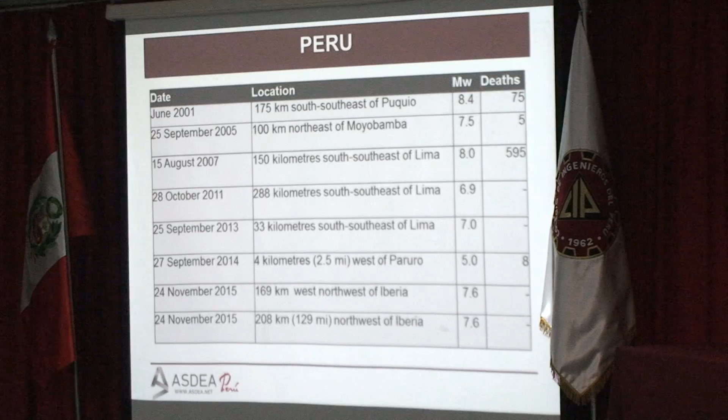I'm going to go really quickly about how you have to approach the idea of how to strengthen a building when you want to retrofit for seismic purposes. So this is a list of things that we have to follow.

¿Cómo comenzamos a pensar cuando vamos a evaluar y a reforzar una estructura, cualquier estructura? Él está mostrando allí una lista, un checklist, paso a paso, qué es lo que deberíamos hacer.

So the first thing is a structural survey. You need to investigate how the building is made, and you have also to develop an experimental campaign. Then you have to evaluate the loads, including obviously the seismic loads, and what is the hazard that you have to face and is function of the site. You have to derive numerical models, so you have to develop the calculations, and the more advanced are the calculations, obviously better is the prediction of the response of the structure.

Then, based on the model, so based on the results of the vulnerability, you have to design the intervention. And you have different options. We are going to talk about the option after. And at the end, when you design the intervention, you need to evaluate also the capacity of the building after the strengthening.

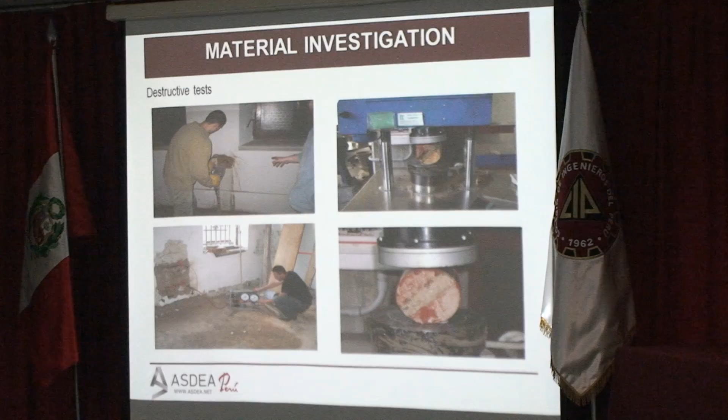And there are also non-destructive tests, including the pacometer to evaluate the details of the rebars, or also bore drilling. We insert inside the masonry a boroscope to evaluate what there is inside the masonry.

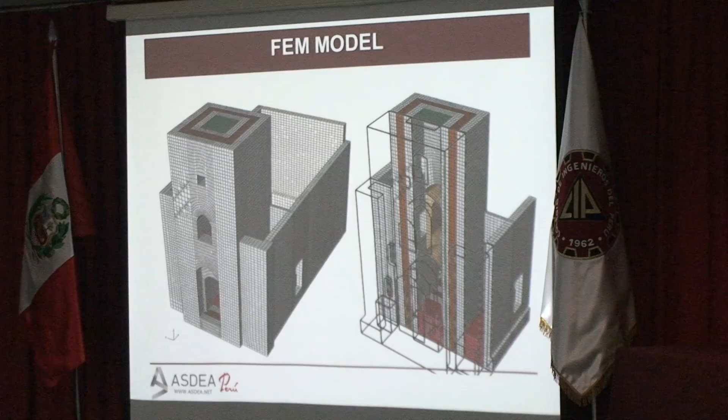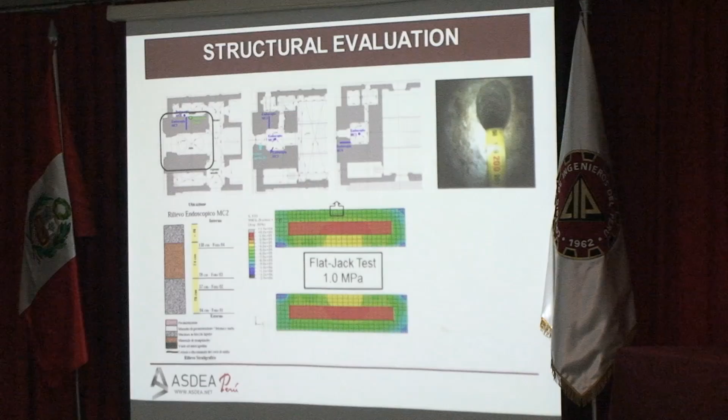We performed all the tests, the experimental campaign to evaluate the masonry properties, and we developed sophisticated nonlinear models to consider the compressive and tensile behavior of the masonry. Se desarrollaron todos los ensayos, destructivos y algunos no destructivos, para poder evaluar las propiedades mecánicas del material, y se hicieron algunas leyes constitutivas para darle las características propias del material: piedra, albañilería, etc.

And we also evaluated the mode frequencies, the natural frequency of the cathedral, using ambient vibration. También se evaluó los modos de vibración a través de vibraciones ambientales, y se compararon con los resultados numéricos en términos de vibración. This is a perfect way to calibrate the numerical model, because we are sure that the frequencies we are considering are the natural frequency of the building. Es una muy buena forma de calibrar nuestros modelos numéricos. Nosotros dibujamos en la computadora, pero de ahí no sabemos si están bien o no. Una forma de calibrarlos es tratar de igualar el modo, la frecuencia de vibración numérica con la frecuencia de vibración de los ensayos vibracionales en campo.

So, as you can see, the model can give all the damage evolution of the building under seismic excitation. This is real — there is an accelerogram you will see after, at the base of the soil, and this is the response of the structure. So as you can see, you can decide exactly where to intervene to improve the capacity of the building. With the linear analysis, you are not able to see this evolution.

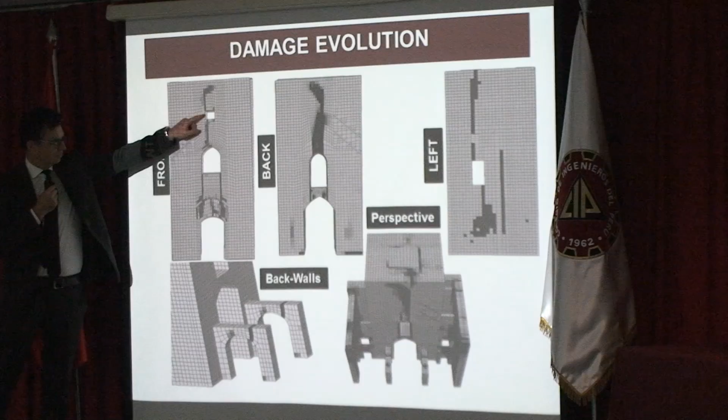Este modelo numérico tiene material no lineal, no hay nada que sea lineal. Aquí se ha aplicado un movimiento sísmico a la base, y ustedes van viendo en el video, en las partes oscuras, cómo se van abriendo las fisuras en esa estructura. Entonces, con estos modelos ya calibrados, uno puede decidir dónde intervenir, qué tipo de refuerzo colocar, cómo hacerlo, etc. Pero lo importante es que a través de un análisis sofisticado no lineal se puede verificar verdaderamente por dónde se producen las fisuras.

Aquí el análisis lineal, como ustedes saben, no funcionaría, porque un análisis lineal asume que el material nunca se rompe. Entonces tenemos que hacer esos tipos de modelos.

Y para esto se necesita un poco de experiencia y de investigación. Por eso trabajamos con doctores en ingeniería, magíster, etcétera, para involucrar la parte académica con la parte profesional. Es algo que nos ha dado muy buen resultado. Los jóvenes que trabajan ahí están muy entusiastas y son empeñosos en hacer todos estos modelos.

So I can show you, this is soil, you put the acceleration at the base, so it's an accelerogram, a natural accelerogram. This is the propagation of the seismic wave through the base of the building, and this is the behavior of the building at the top. So if you can see, this is a seismic acceleration, and this is the shaking of the building, considering all the effects.

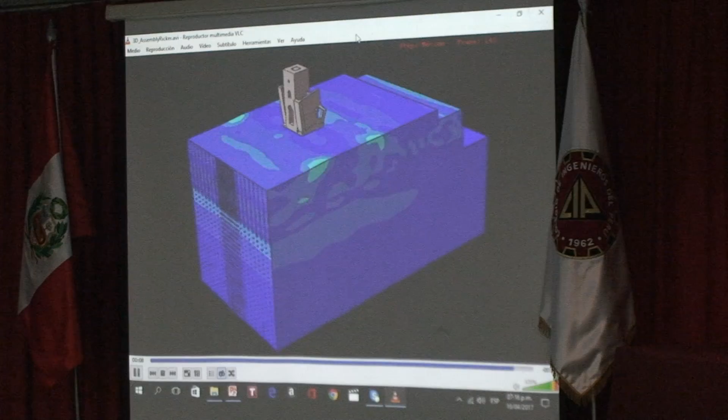Ok, este es el ejemplo del modelo completo. Ven ahí la parte del suelo, que en realidad era una especie de colina, y se investigó también las propiedades del material con diferentes tipos de ensayos geofísicos. Entonces ahí se aplicó un acelerograma natural en la base y ven cómo se van propagando las ondas. Y arriba está la iglesia o cualquier tipo de estructura, donde también se puede ver cómo se propagan las ondas y cómo puede ir colapsando.

Esto es algo muy importante porque a veces cuando uno piensa en estructura histórica, hace maravillas en la parte superior, pero no sabemos nada del suelo. Y también es importante involucrar el estudio del suelo para casos específicos.

This is the most sophisticated analysis that we can perform, but it's very sophisticated, and only few researchers are able to develop such an analysis, so complicated. Something that instead can be used as professional is a pushover analysis. Pushover analysis consists of a nonlinear analysis in which first we load the building vertically with the vertical load, the gravity load, and then we push the building laterally using a force distribution that can represent the seismic excitation.

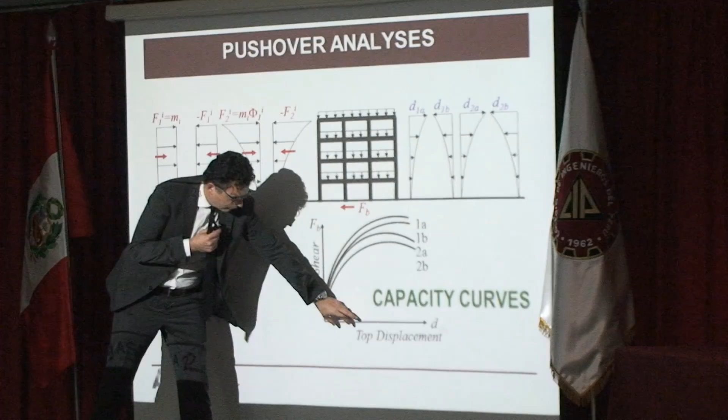The capacity curve depicts the top displacement of the building versus the shear at the base.

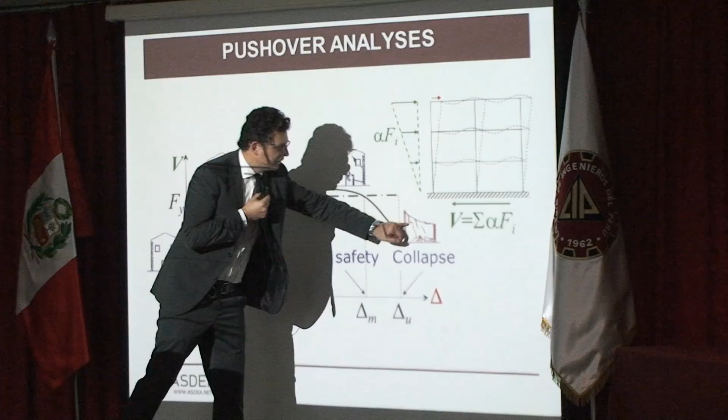the case of concrete. Until life safety, the limit state of life safety, where the building is still safe for a certain lateral load. And this is a collapse limit state in which we are really close to collapse. Like this, basically, with this distribution, we are able to measure the exact performance of the building.

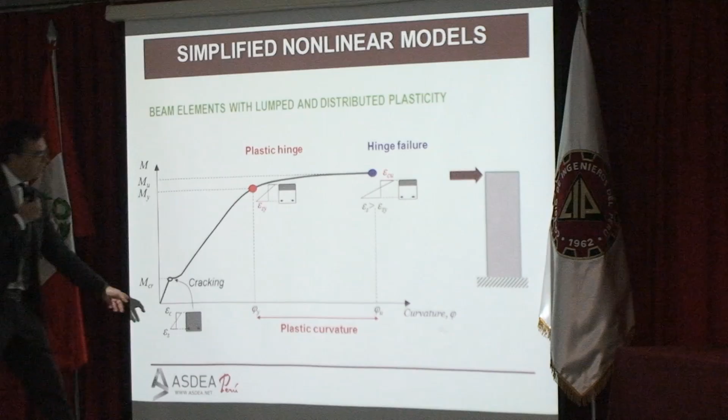Then the concrete cracks, so there is a change in the stiffness up to the yielding of the steel, and then at the end there is a collapse due to compression, failure in compression of the concrete. And this is a behavior that we need to depict when we want to study the nonlinear behavior of the structure.

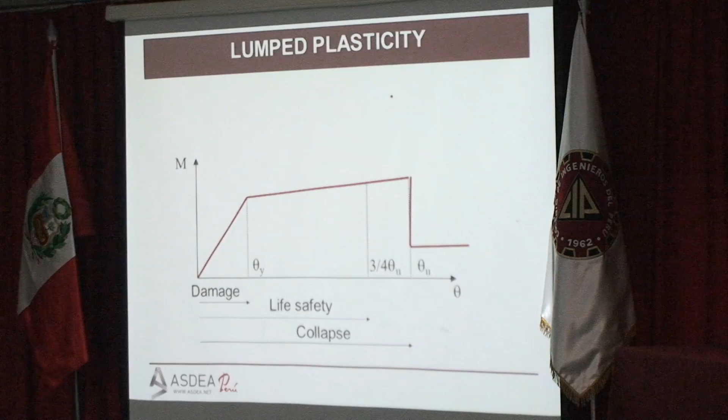So let's make an example so it's much easier, and think of this as a confined masonry building, where we study the behavior of the single panel using a beam element and using lumped plasticity, so the plastic hinge concentrated at the end of the element.

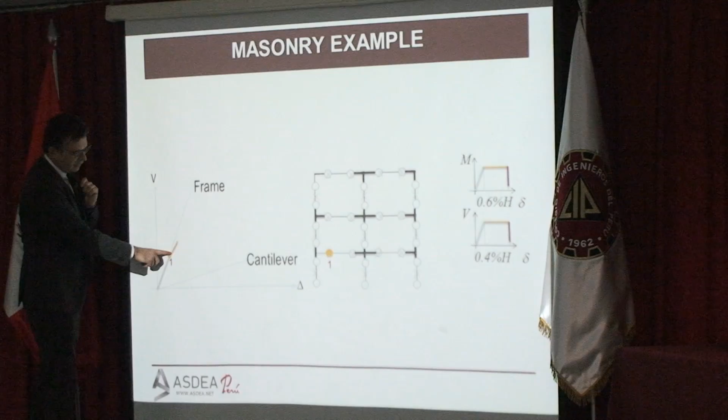And this is the behavior of the building. So we push and we see the behavior. So for example, in this case, there is a hinge, there is a beam that is yielding in tension. So you see from elastic behavior, it changes in plastic. Then we keep on pushing, so there is a failure of the beam.

We keep on pushing, there is another yielding of another hinge. We keep on pushing, the other beams yield, and at the end there is a failure due to the pier failure. And this is a typical behavior that you could observe in a building.

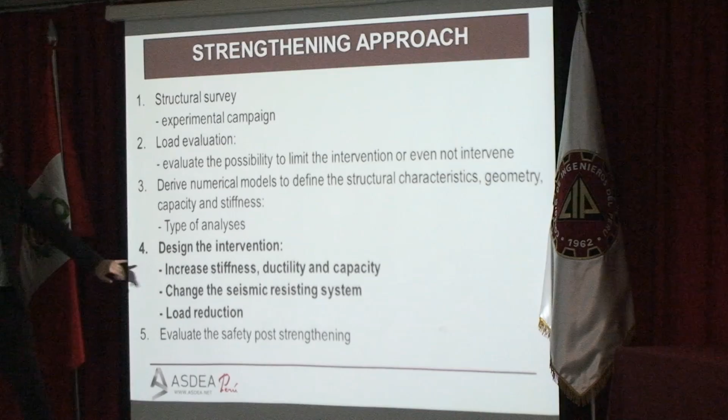So now that we have the vulnerability of the building, since we are able to track exactly how the building is failing, we need to decide how we want to strengthen it. And there are several techniques. We are talking today about innovative techniques, but in particular, I would like to talk about the difference between increasing the stiffness or increasing the ductility or the capacity.

So how you can decide how you want the building to perform. This is the most important part. Or also how you can change the resisting system or reduce the load using seismic isolation.

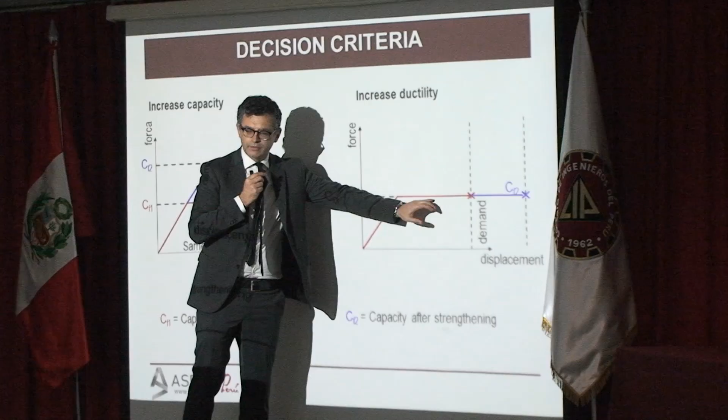Or on the other end, like today we are going to talk about steel reinforced grout or also fiber reinforced polymer. We decide to not increase the strength, but we decide to increase the ductility, so the displacement. So basically we let the building deform more than the existing building.

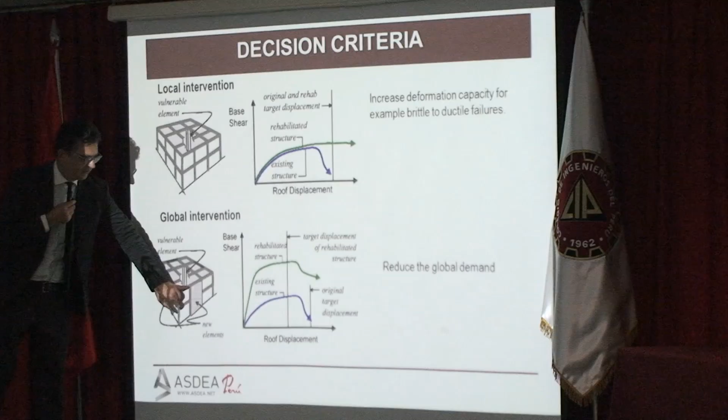Otherwise, I can intervene with a global intervention, so with shear walls, for example, or with an external frame, and in this way, as you can see, I can increase the capacity of the building a lot more than the ductility.

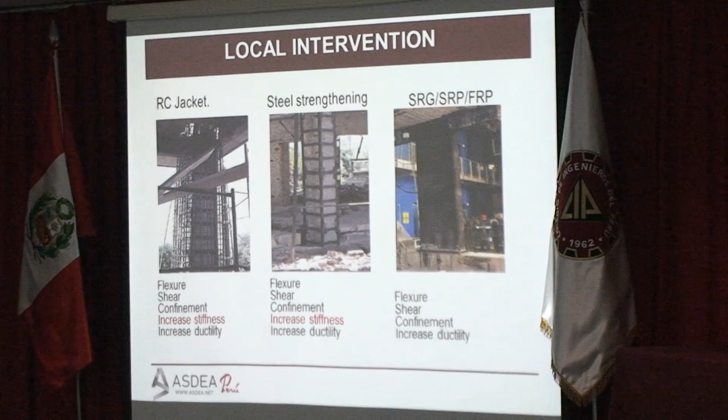Or otherwise, as you can see, we use innovative dissipative braces, or, we are going to talk about this today, seismic protection using seismic isolation.

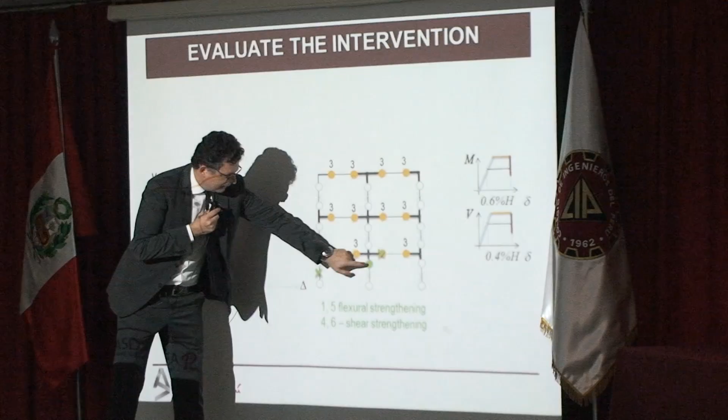This is perfect because I can decide to use a capacity design, so I want the columns stronger than the beams. This way I'm able to achieve a much larger displacement, therefore a much larger ductility, so I can dissipate way more energy. And this is tracked, it's my decision to have this behavior.

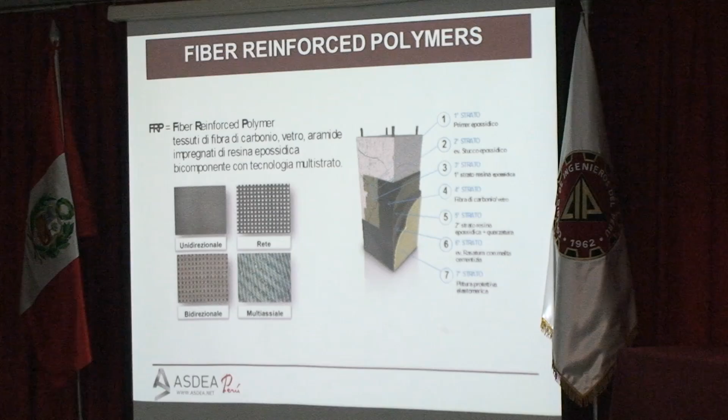So these instead are the new materials that we are studying now, and we are applying in several buildings. We did already. These are carbon fibers. They have high strength, we will see, and they can come in several weights, okay?

And we normally impregnate this with epoxy resin, but lately we are using also grout. So we will see with the grout the efficiency increases because you can use the grout also to repair the columns. So these are the materials, as you can see they are really light, and the thickness is a fraction of a millimeter.

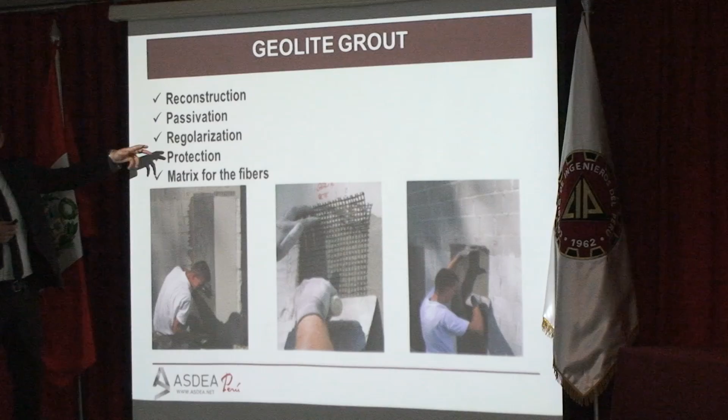So with this innovative grout, we are able to perform this with the company we are working with. It's called Kerakoll. We are going to talk about it. We can perform the reconstruction, the passivation of the steel rebars that are oxidized, regularization of the surface, protection, and also we can impregnate the fibers at the same moment. So basically, we will see the application.

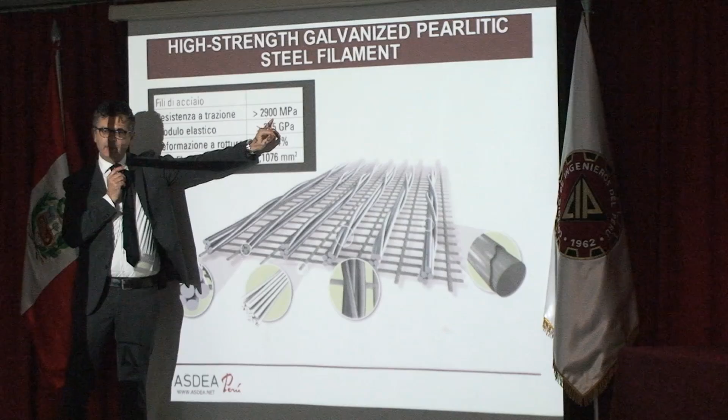So the tensile strength of this material is 2,900 megapascals, so it's roughly 5 times the normal steel.

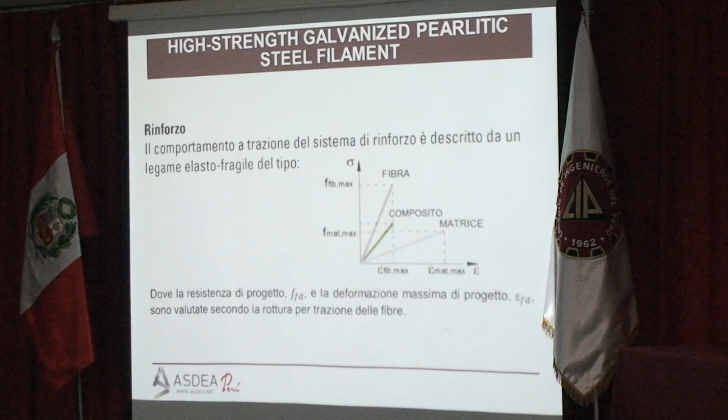So we are performing a lot of tests. The company we are working with here is Kerakoll. These are tests performed by the University of Roma Tre, and this is the strength of the material in tensile test.

These are the applications that we are going to show, okay?

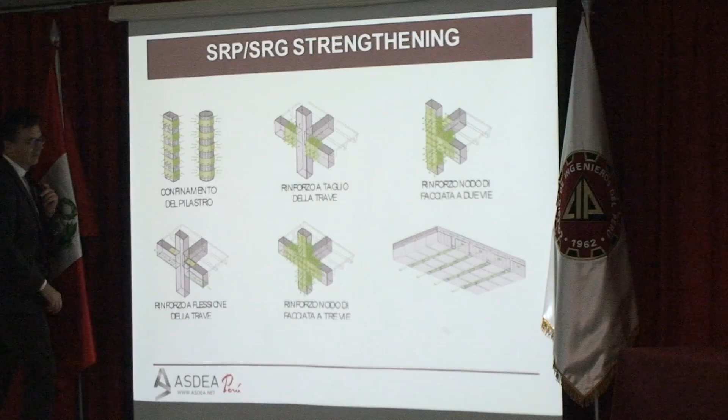So, column confinement to increase the ductility, shear strength of the beam, reinforcing of the joint to increase the shear strength, flexural reinforcement, joint reinforcement, and also slab reinforcement.

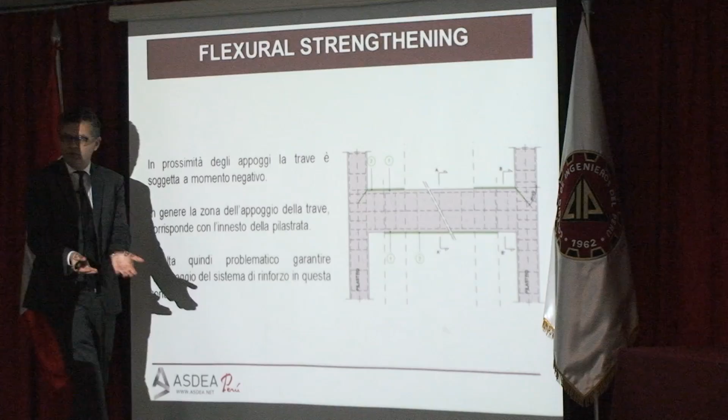So this, to give you an idea, is a flexural strengthening of the beam. You see, the only thing we do, we literally glue the material I showed you with grout or epoxy under or above the beam.

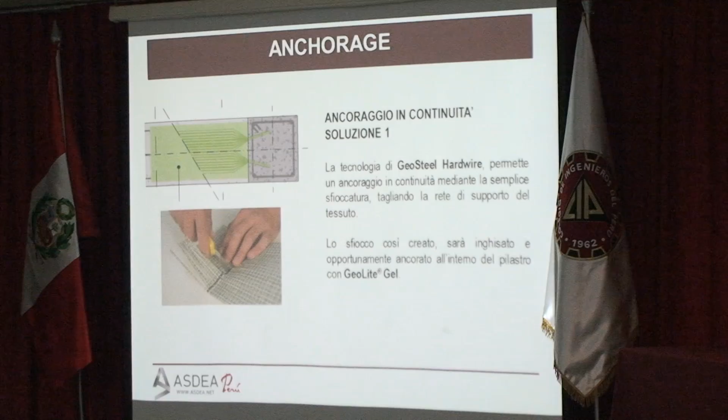So these are some examples of how we guarantee the anchorage, also bending the fiber and then wrapping the column around the fiber. This is a much better detail than carbon fiber, because carbon fibers are very difficult to anchor, to guarantee the anchorage, because they have a very low shear strength.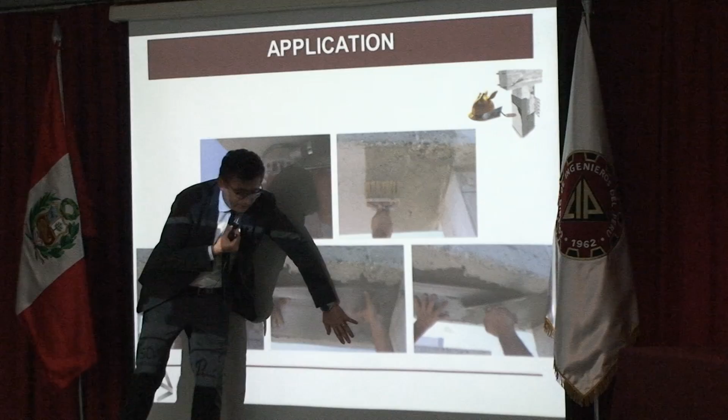Okay. So this is the application of the flexural strengthening. So we clean the surface, we apply, in this case, the epoxy resin, or it could be the same with a layer of grout. We apply the fiber, and then we finish it with the final finish of grout or epoxy resin at the top to impregnate the fiber. And it's very simple.

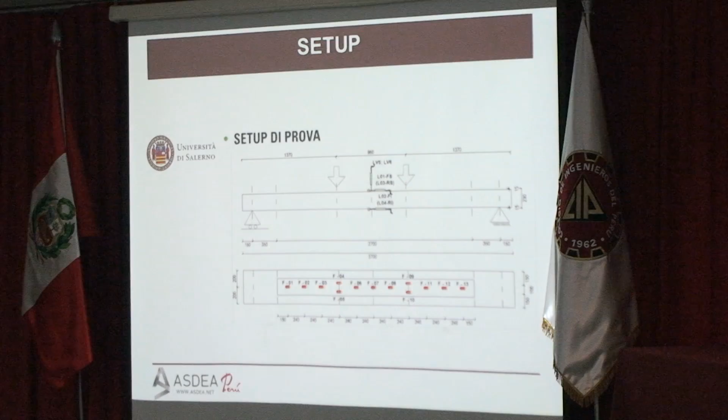Como ustedes ven, se puede hasta duplicar la capacidad solamente con una malla que tiene un espesor de 0.3 milímetros de espesor. El sistema permite, como dice usted, duplicar, o sea que una malla con otra malla. No, aquí estamos solamente... No, it's possible.

Like if you use, for example, the thinner fiber, you can also duplicate or triplicate the amount of fiber. Se puede, digamos, colocar una sobre otra, no hay ningún problema, pero en este caso está variando el espesor. O sea, hay esa malla que está pasando, algunas de repente tienen un espesor de 0,2 milímetros, otras tendrán de 0,4, etc. Pero también se puede colocar una sobre otra.

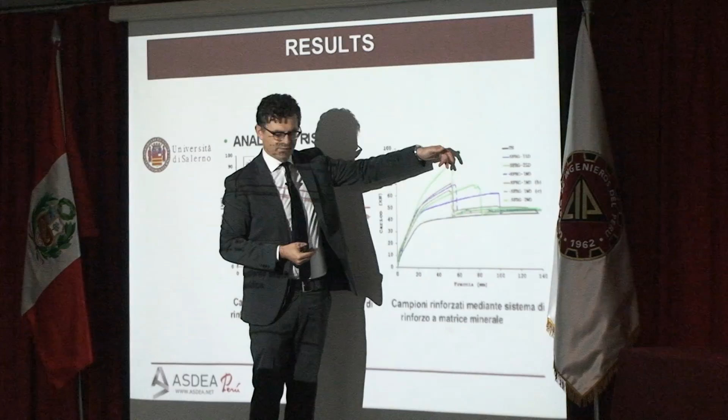Pero questo qua, this one, for example, is 2 layers of medium density. Medium density together, glued together. Ok, esa curva verde, por ejemplo, son 2 mallas colocadas, de otra densidad.

So, I want to show you a design example. Actually, first I want to show you this so you can see. Va a mostrar ahora, por ejemplo, un ejemplo de diseño. Al último vamos a dejar la presentación para que ustedes de repente puedan ir analizando así.

Example in Italy of buildings that need to be strengthened. They are highly degraded. Per studiare il comportamento dei nuovi materiali compositi in fibra di acciaio e matrice minerale per...

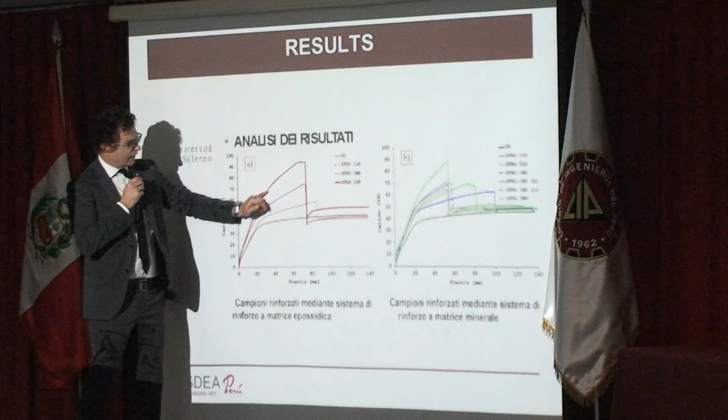So this show that some of the tests that we perform to see how the system is behaving. As you can see, when it reaches a certain point, there is a brittle failure, so there is a decrease in ductility but increasing capacity in the case of the flexural beam.

Son algunos de los ejemplos de los ensayos que se han realizado en colaboración con otras universidades, en el cual también se puede incrementar la capacidad y algunas veces también hasta la ductilidad.

So just a quick example of a building that we strengthened, so you can see how we designed the strengthening of this building. This is a building that was damaged during the earthquake of 2009 in Italy. Es un ejemplo, ahora va a ser un ejemplo de diseño, de cómo reforzar una estructura que fue dañada en un terremoto en el 2009, en la parte central de Italia.

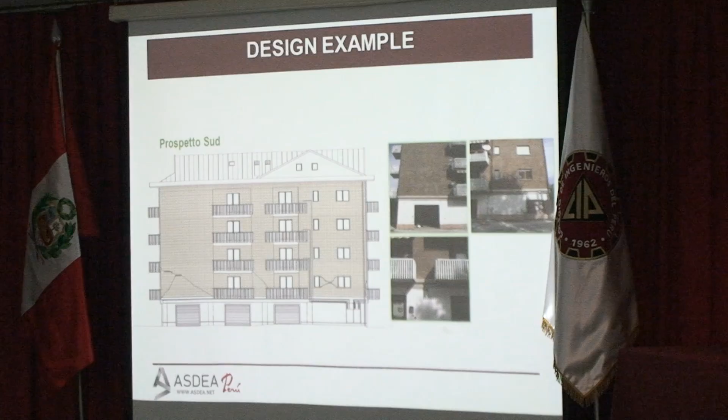So this is damage. As you can see, there are shear cracks in the building, especially at the base of the building. So north, south, east. Sí, ahí como ustedes ven, ahí el patrón de daños en diversos muros y elementos también de concreto armado en el interior.

So as you can see, this is a numerical model. We can't go too much into details. This is a beam that we are strengthening. The beam doesn't have enough capacity, so we decided to strengthen it using the steel epoxy combination.

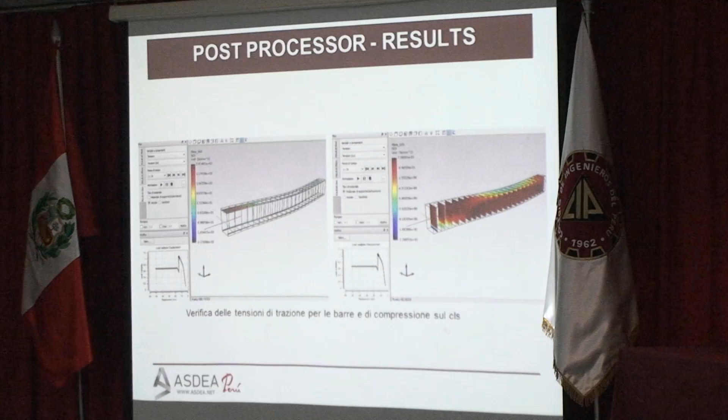Or this, the steel of the rebar. So this is very interesting, the cracking of the concrete.

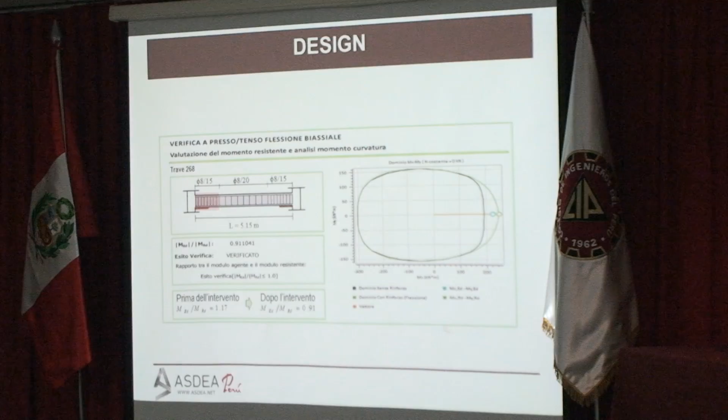And this is the example of what we have to do for the strengthening.

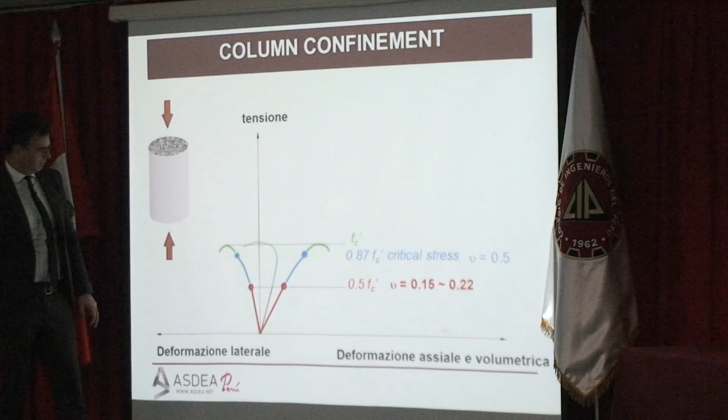At 87%, the concrete starts cracking, and at a certain point, at 100%, you reach the maximum level, and then you have a brittle failure of the sample.

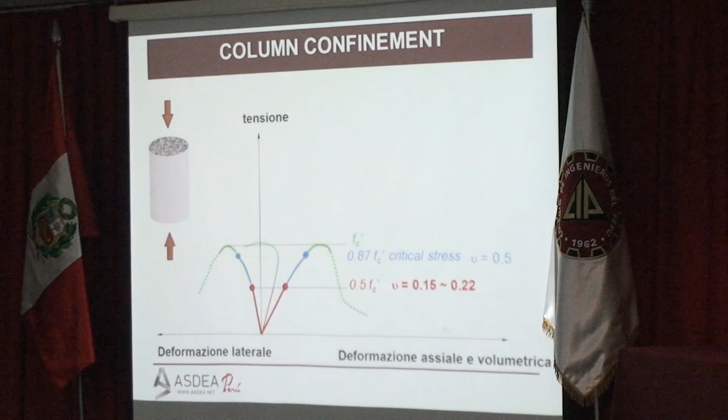If we wrap it with the steel fiber, this is the behavior, the SFRG. So up to roughly 50% of the load, the steel is not playing any role, because the Poisson modulus of the concrete is similar to the Poisson modulus of the steel. Above this, the cracks increase, and you see increased ductility of the system and increased strength of the system, just from wrapping the system.

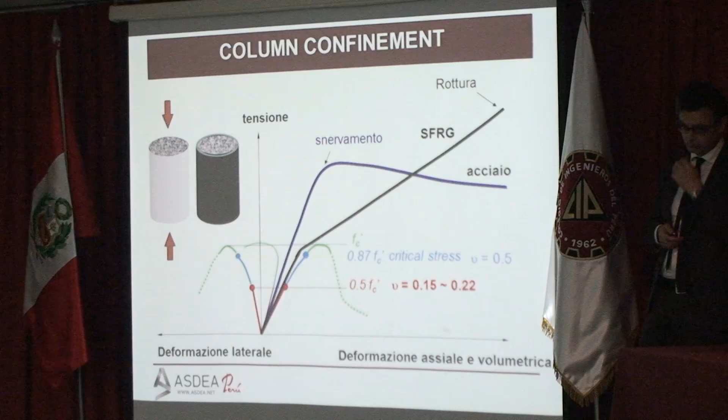For this application, similar to before, there is a cleaning of the surface, preparation of the surface, then there is a first layer of grout, bending of the steel fibers, then there is a steel fiber applied, and then the final finishing with the grout.

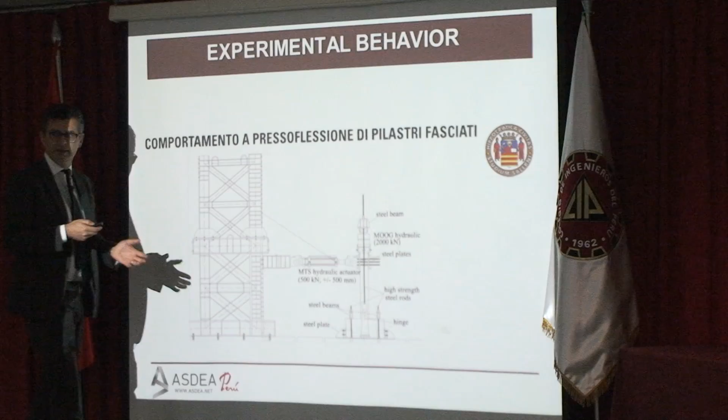And we are going to show you the different behavior with the wrapping and with the existing column.

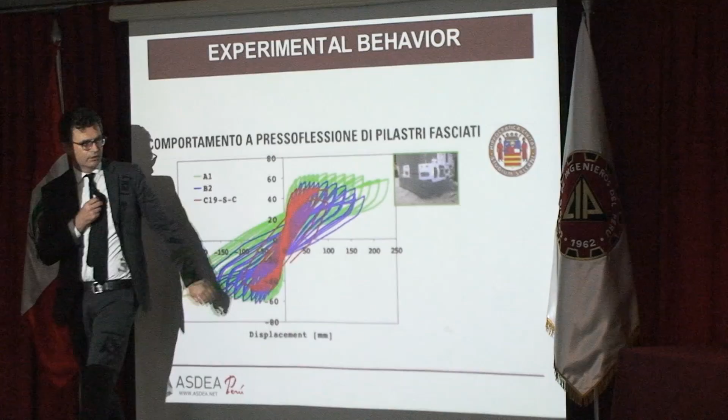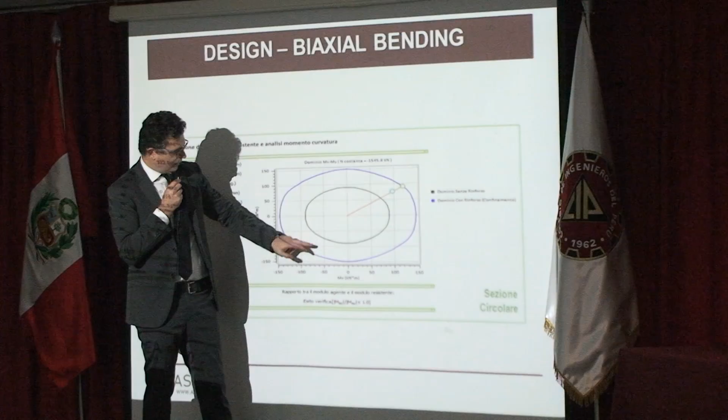And this is the behavior. So this is a biaxial bending strength before the application of the fiber, and this is the capacity after the application of the fiber. Just wrapping basically doubles the capacity of the element.

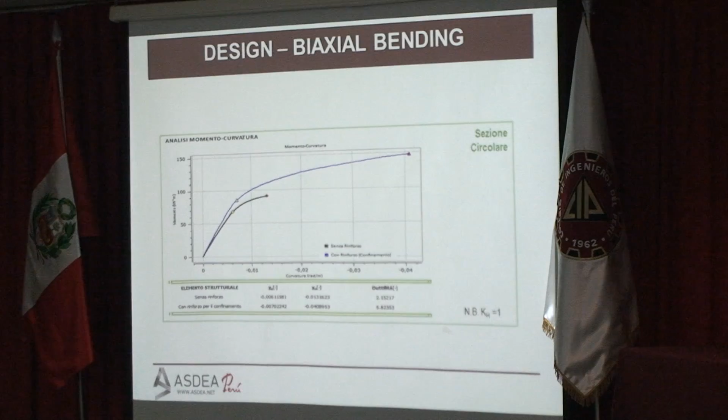So in this application, as you can see, if we only increase the strength due to the confinement, we don't even need to anchor the fibers to the foundations. We want to increase also the flexural strength, so we need to also use vertical fibers.

So it's only important to know that in this way we can increase the ductility and also the strength.

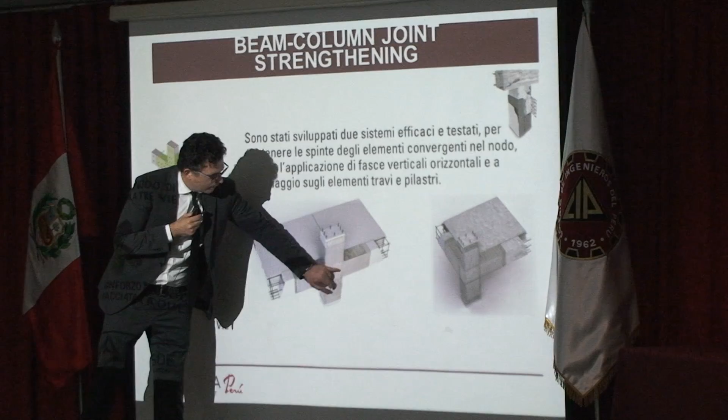So this is a reinforcement of the joints. Most of the time, reinforced concrete buildings have problems because of the joints, column-beam connections.

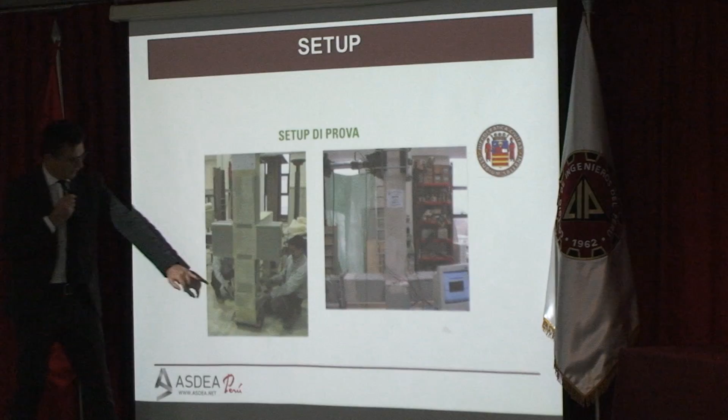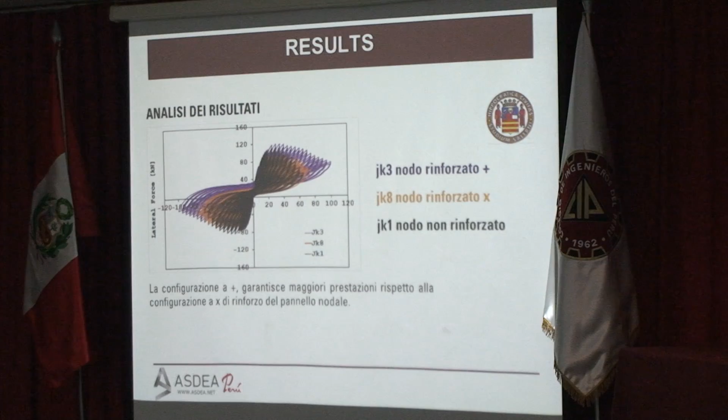So another example of design, we normally strengthen the joints that are external, not the joints that are internal, with basically the intersection of four beams, because they are confined.

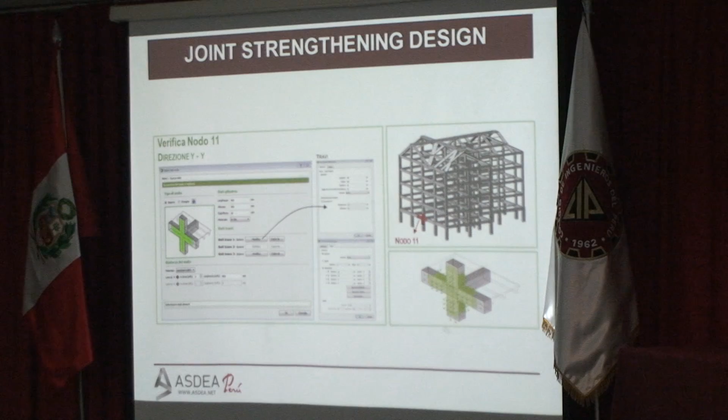The last part is a shear strengthening. We can increase also the shear capacity of the beam, just gluing externally the steel fiber.

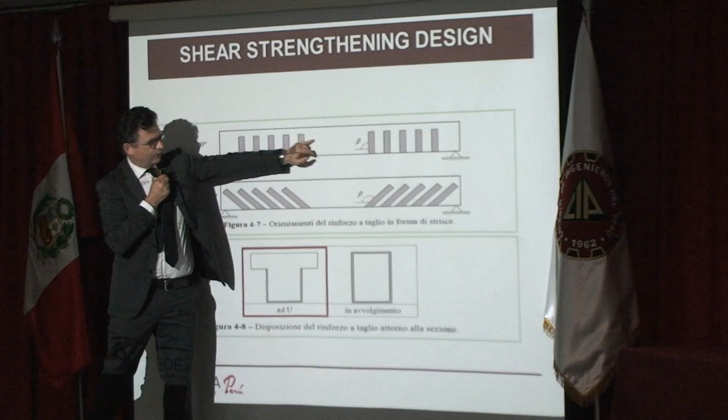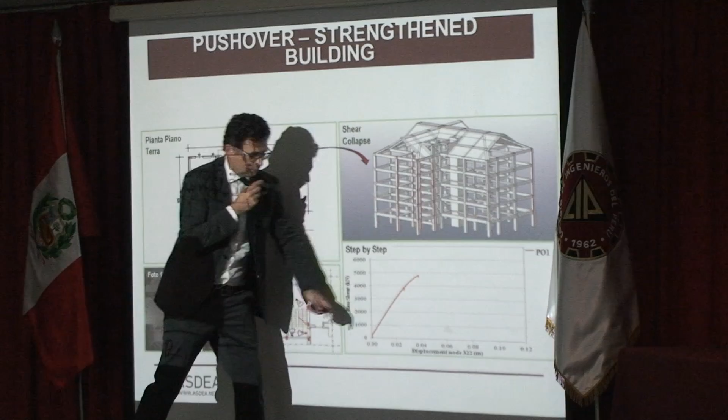Now we strengthen the column in shear, that column in shear.

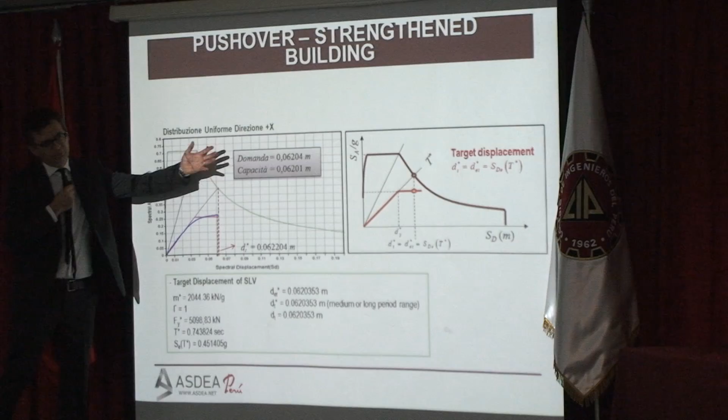This is just an example of the capacity that we reach, but we don't go into details because it's late. I want to show you the next part.

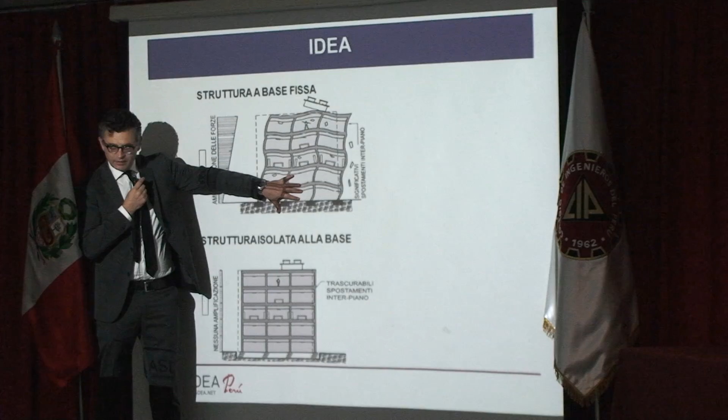So what is the effect of the isolation? You probably know this seismic excitation. If the building is fixed at the base, it is shaking in this direction with a very high acceleration. If we are able to put the isolation at the base, the building is moving rigidly and the acceleration is decreased, as we'll see, decreased a lot.

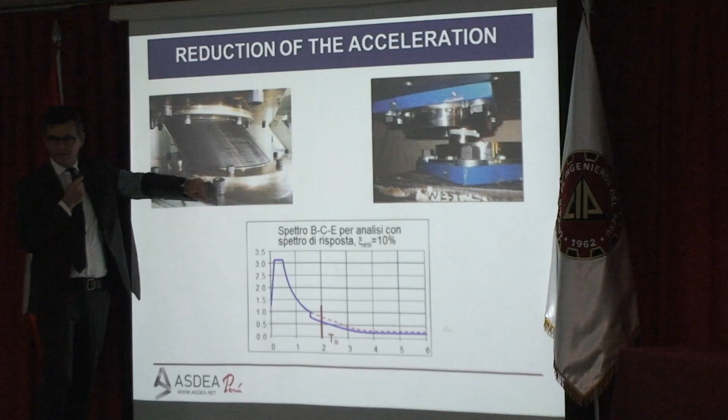Okay, this is the effect. So these are the isolators. These are lead rubber bearing isolators, made of rubber and lead. And these instead are friction pendulum. So this is a response spectrum of the site. When the building is not isolated, typically we are at the plateau or just after the plateau, so you have an acceleration at this level. If we isolate the building, so we increase the period of the structure, we can reduce the acceleration even 10 times.

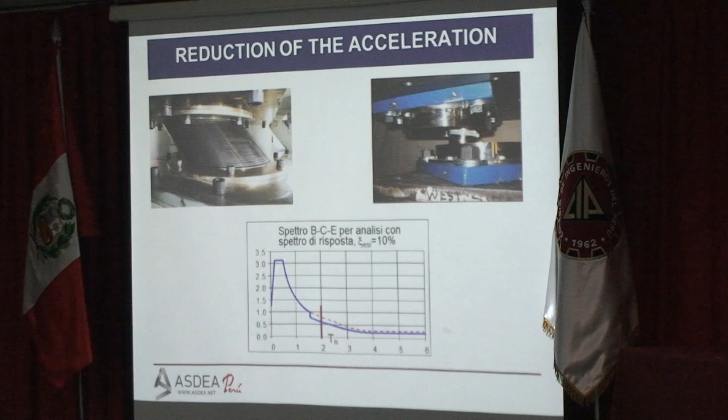So I want to show first a video so everything is easier.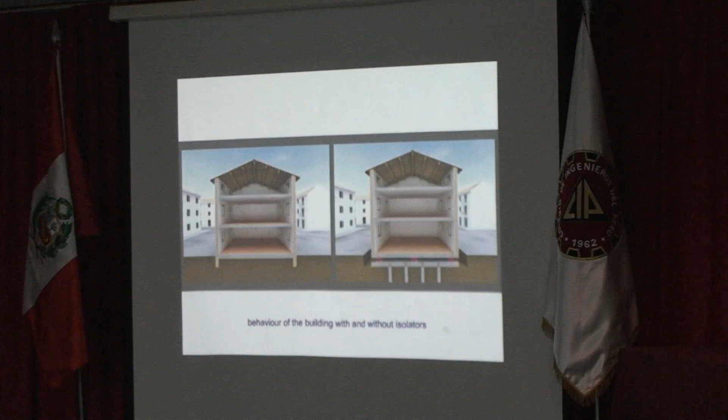So the effect is this, and it's possible, as we saw, to increase the height of the building, and even we can move the building if we need. Or even now they are planning to move a tower of 100 meters in Turkey.

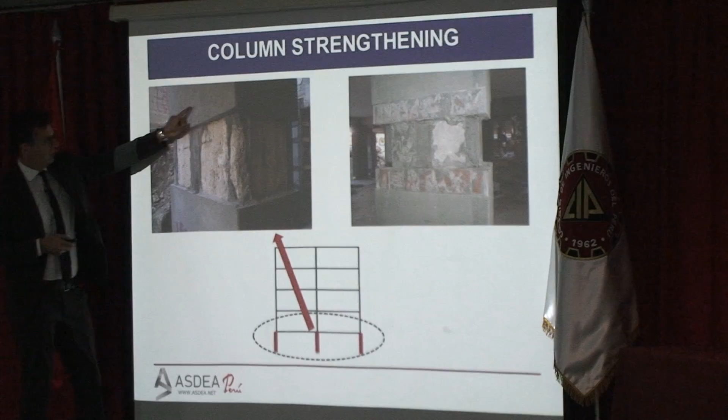We could use also polymers, like fibers.

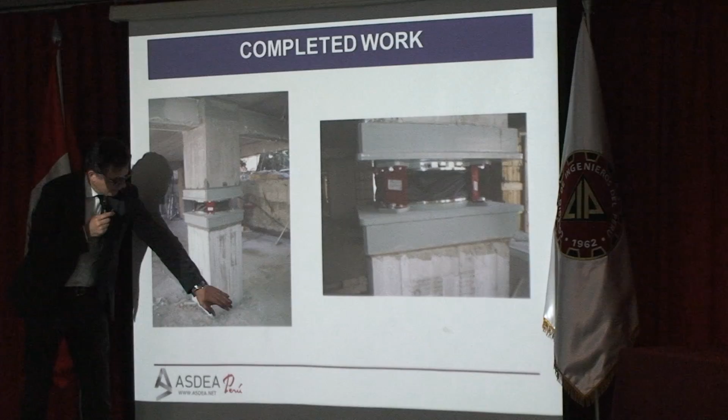Typically, the best solution is to put it at the base, but you need to provide a rigid behavior above the isolator. So if you put it at the base, in this case, you need to add a slab. So this could be more expensive. So sometimes we decide to do it at the first floor. It depends on the solution, which one is the cheapest.

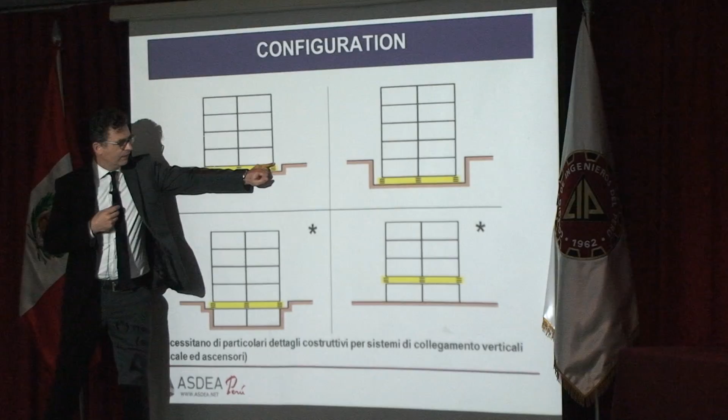This is the optimal solution. Unfortunately, in this way, like before, we need to add a slab at the top. So we are going to have a slab here and a slab here. And typically, this slab is expensive. And sometimes you don't have the space, so you need to raise the building.

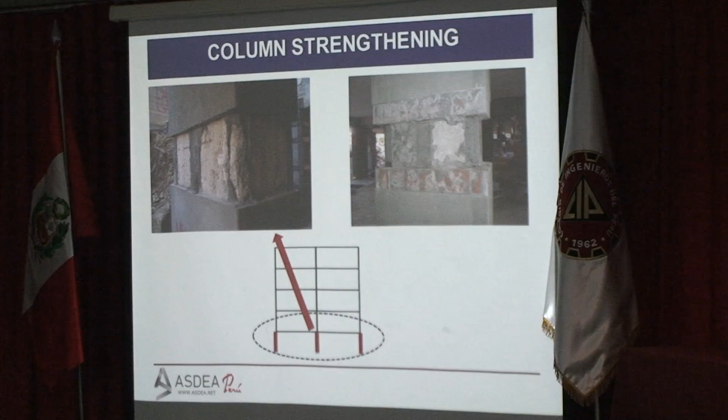We are designing a very important building. I can show you after, and we measure the acceleration with nonlinear time history. Otherwise, there is no reason to isolate. So you transform the high acceleration into displacement. This is the idea. So you have large displacement but low acceleration. So this is what we have also experienced. I'll show you a building that we are designing in Chile.

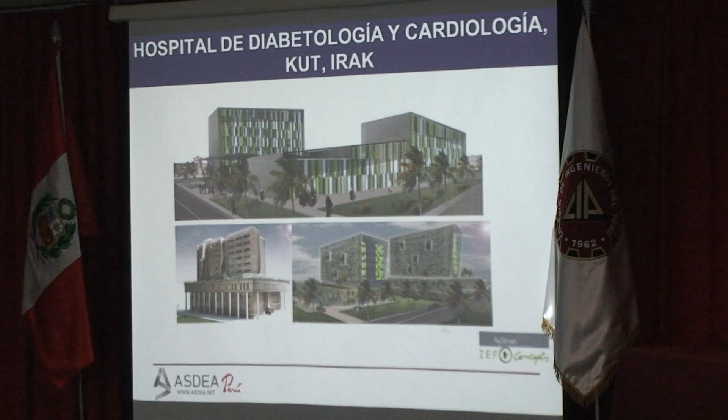And this is how we decided to operate. Also in this case, we decided to isolate the building at the first floor because it was more convenient, because it was above the ground.